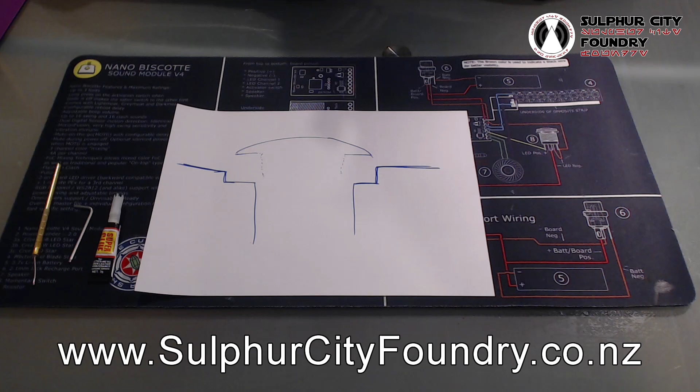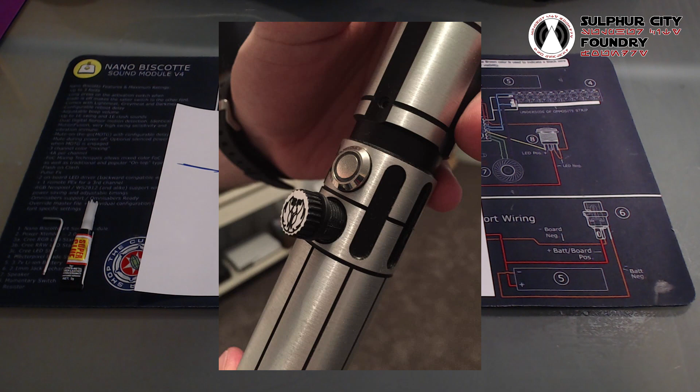This came up as a question posed on the local group. A chap had his recharge port and switch start to come away from the hilt. So I thought I'd shoot a quick video showing you a technique I use to fix my switches to the hilts.

Now first off, some hilts use threaded holes for their switches. So Saber Trio, Vader's Vault for example, you actually have to physically screw the switch into the hole. But like I said, a lot of manufacturers actually just drill a plain hole for you to fix your switch into.

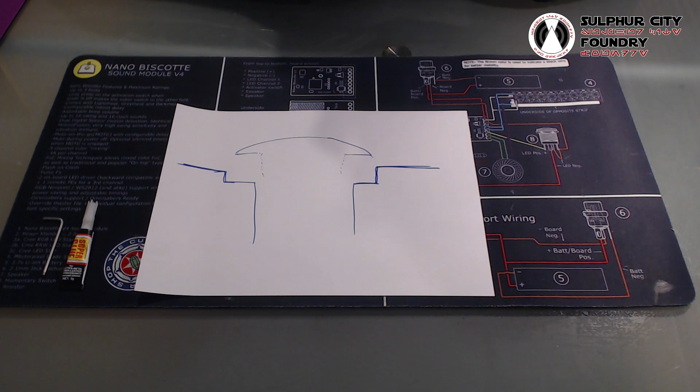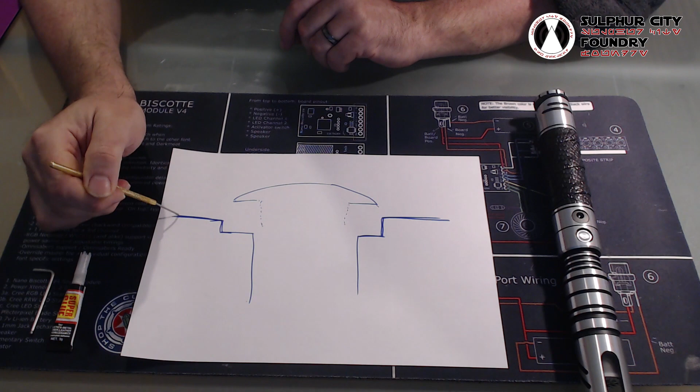I'm just going to use a quick little diagram today to show you how you want to go about fixing your switch. This will be, for example, for a Saber Forge hilt. So when manufacturers drill their holes, in most cases they will drill a small recess for the switch so it sits flush into the hilt like that.

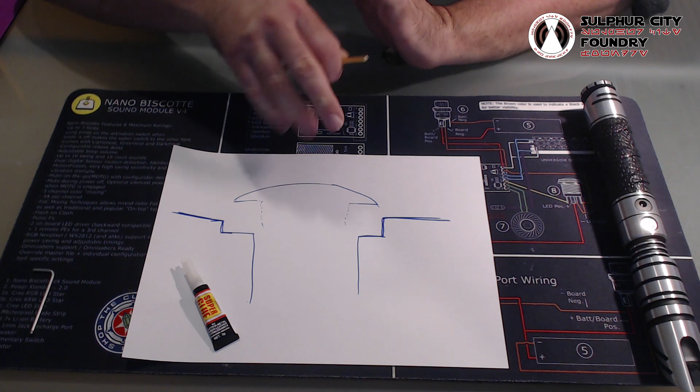So what you want to do to actually make sure your switches stay there is just use something - this is a technique I use. Just use a little bit of super glue. Now you might think that's a bit of an odd choice. Super glue can be pretty messy, pretty icky sometimes, but when used sparingly it's actually perfect for the job, and I'm just going to explain why.

So super glue is obviously quite a strong adhesive. When you're applying it to metals, and let's say you use it very sparingly, especially for sabers, you apply it to the recessed upper surface, just here and here - remember, that's a circle. You essentially want to apply just enough to keep the switch stuck and glued into the hilt for when you're using it dueling and everything.

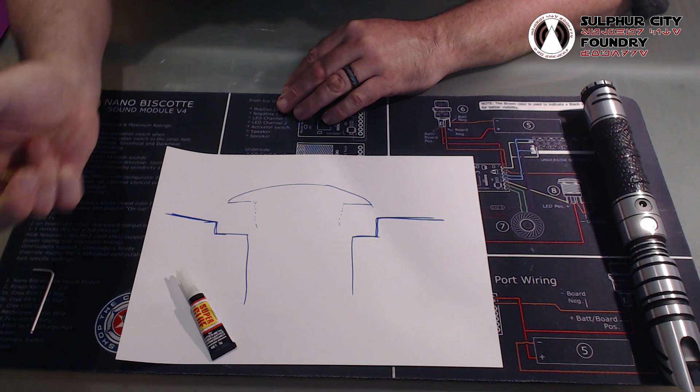But if you ever need to gain access to your electronics, the beauty with this stuff is it's quite brittle, so you can actually break the bond just using something physical like a screwdriver. Put it down the emitter end and use it to lift the switches out and break that seal. Refer to one of my other videos for how to remove switches on Ultra Sabers and Saber Forge for that.

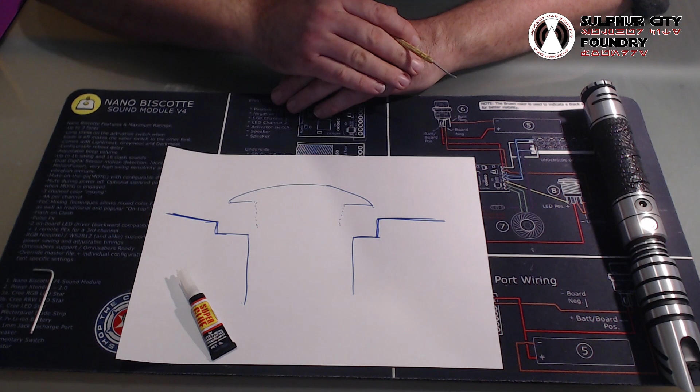So how do we apply just the right amount of glue to keep the switch stuck, but also not so much that it looks messy and you can't get your switch out.

Basically, just get your super glue, get a little receptacle - something you can throw away or throw into the recycling - and just put a few drops of super glue onto the surface.

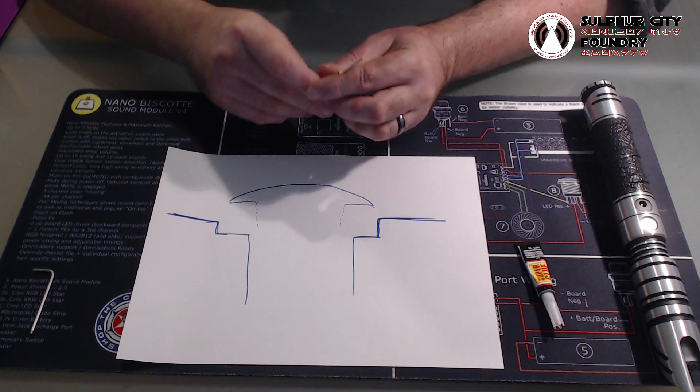Then you want to get a small gizmo tool, something like this. I use a chopped off dental pick. You can actually use an Allen key as well.

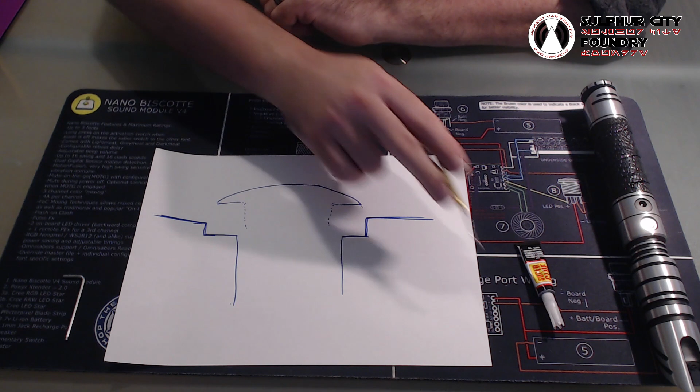Because what you're going to do, you're going to get that tool, dip it into the super glue just so there's a tiny little blob on the end of the tool, and then you're just going to run that tool around the upper surface of this recess - you're only going to go in for one blob, do half the circle, second blob, the other half. You literally just want to make the top of that recess look wet, just like there's a tiny little scrape of glue on.

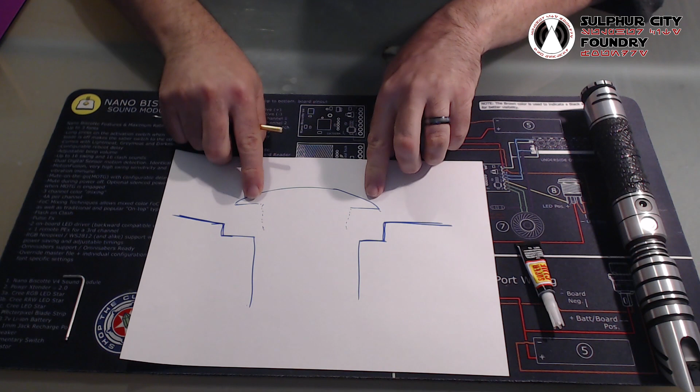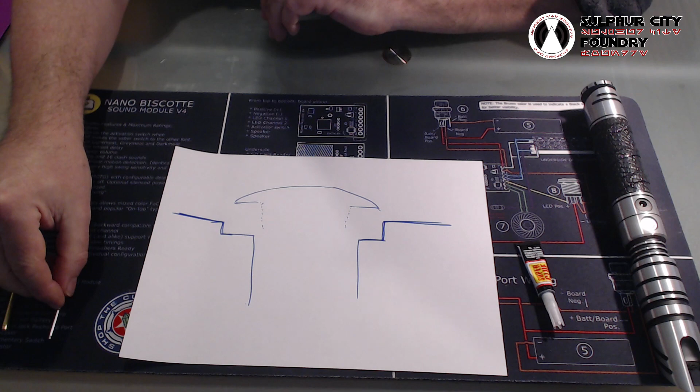Like I said, there's enough there to keep the switch in, but because it's a brittle glue, you can actually get in there, break the bond, and gain access to your electronics again if you need to. That is all there is to it in terms of gluing in a switch.

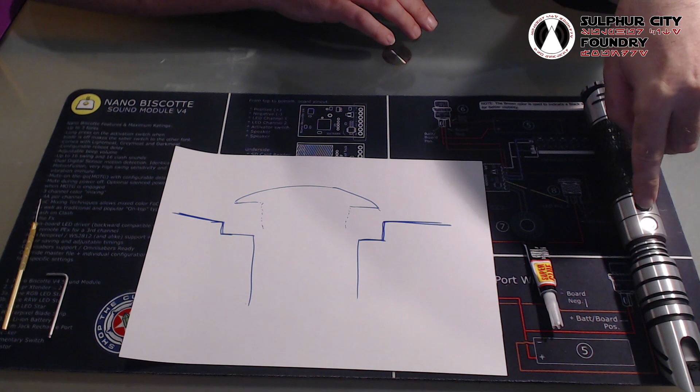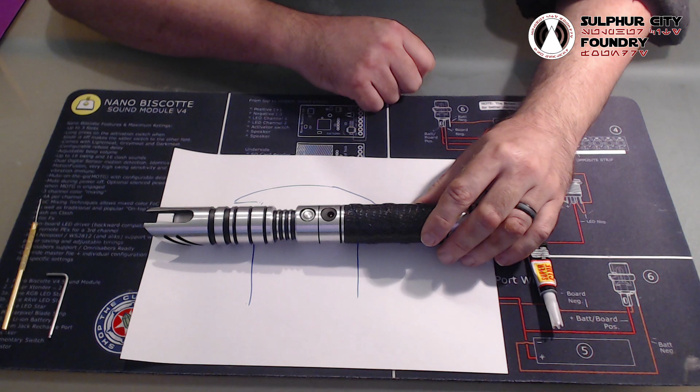Something to note - when you glue in your recharge port, because it's plastic, the glue tends to adhere pretty quickly, so make sure it goes in straight first time. What you can see on the side of the recharge port, there's actually little flattened areas with no thread - they're a good guide to help you get that recharge port in square. But you want to get it in there, make sure it's in line, and hold it there, and it will adhere quite quickly.

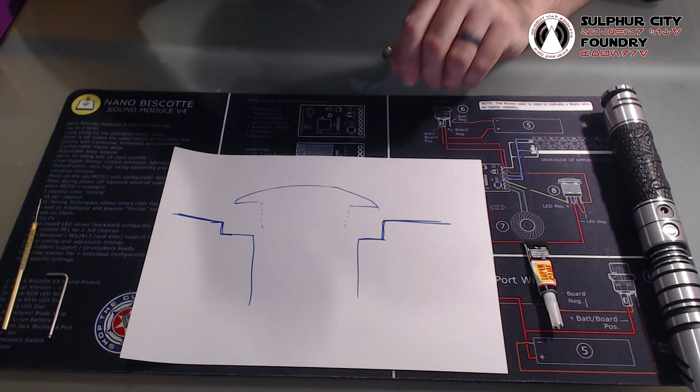Like I say, if you do screw up catastrophically, you can always pop it out again with a screwdriver - just put a screwdriver down the end of the hilt and lift out the switches. Check that out in another video for how to put together a little insulator tool to do that.